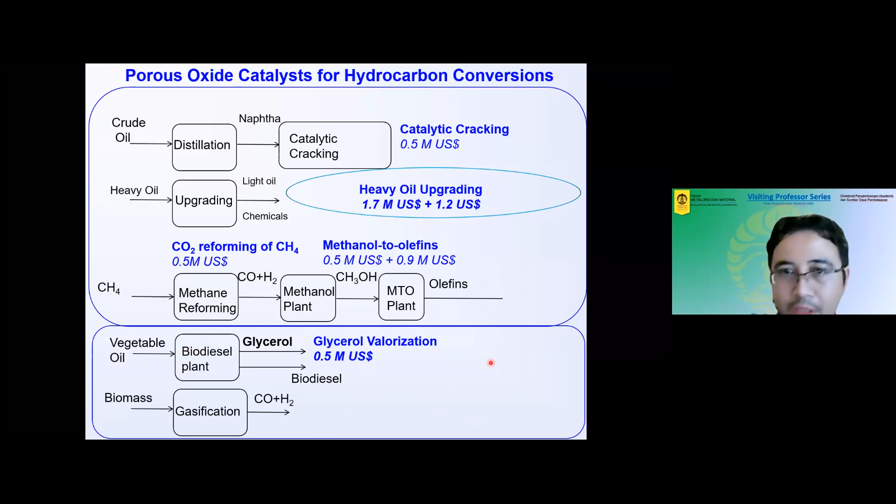As I'm also from Indonesia, I'm also interested in some developments in bioeconomy, how to monetize our natural oils, such as palm oil, etc. So if we see our country, we can see that we import many products. We produce mostly raw materials: oil, gas, coal, and crude palm oil, and then we import quite a number of products, including minerals and materials.

So basically, within this presentation, we would like to give our motivation for ourselves. How can we produce more materials and chemicals from local resources? And then also we would like to apply these materials mostly for energy fields, as a sorbent or as a catalyst.

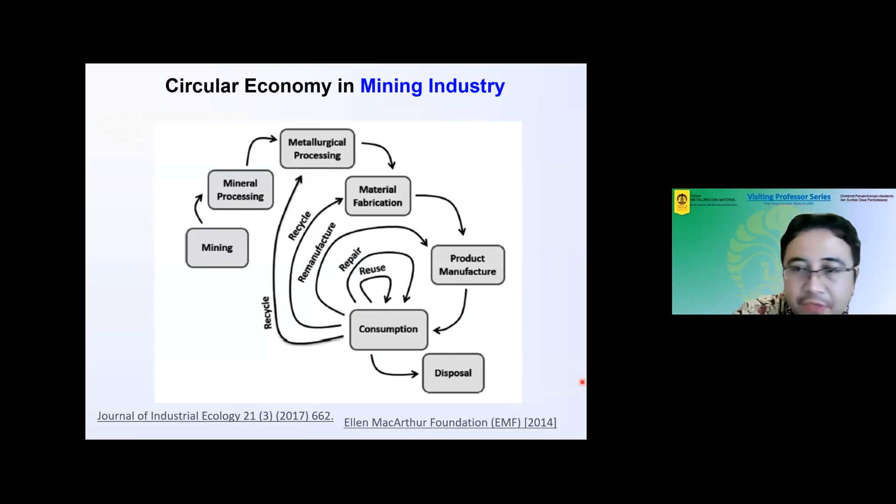Mining industry is one of the backbones of the Indonesian economy. As you can see here, we have the activity basically to get the metals from the mining industry through mineral processing, metallurgical processing, and then we have the fabrications. However, unfortunately, most of our activities are basically towards the beginning of this mining process. We do not have that much material fabrication and product manufacture.

With the needs that we have recently, the circular economy in every field, we need to think how we can have the complete picture by adding the circular economy concept into our mining industry. So in this case, we need to apply the concept of recycle, remanufacture, repair, and reuse.

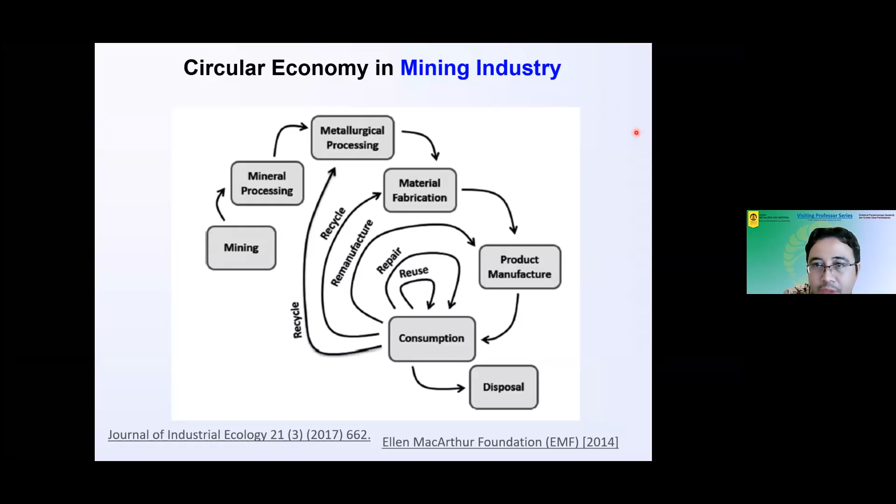And it's also important to relate the mining industry with other industries around us, because the mining industry also requires a lot of energy. So it's also strategic to think how we can have the circular economy not only for mining itself but also for mining and energy.

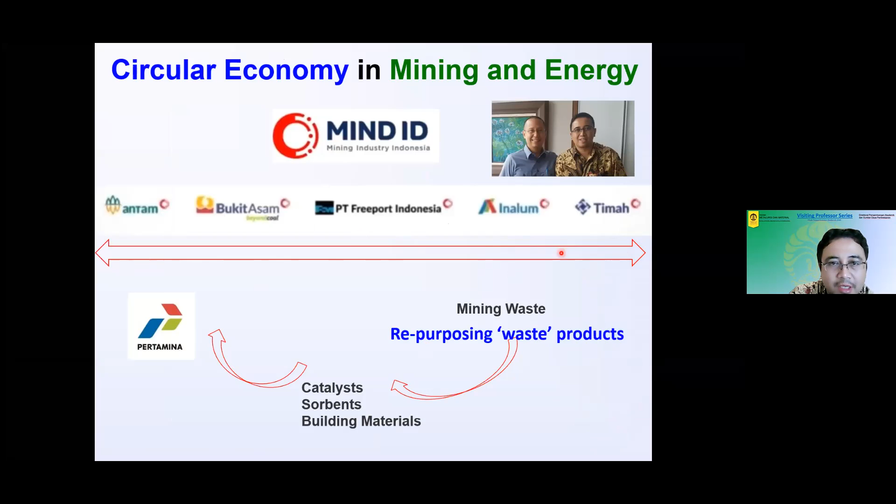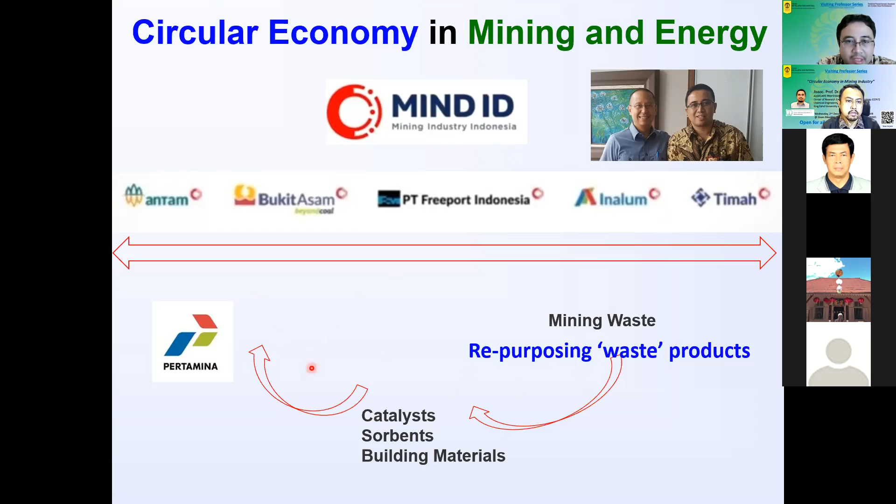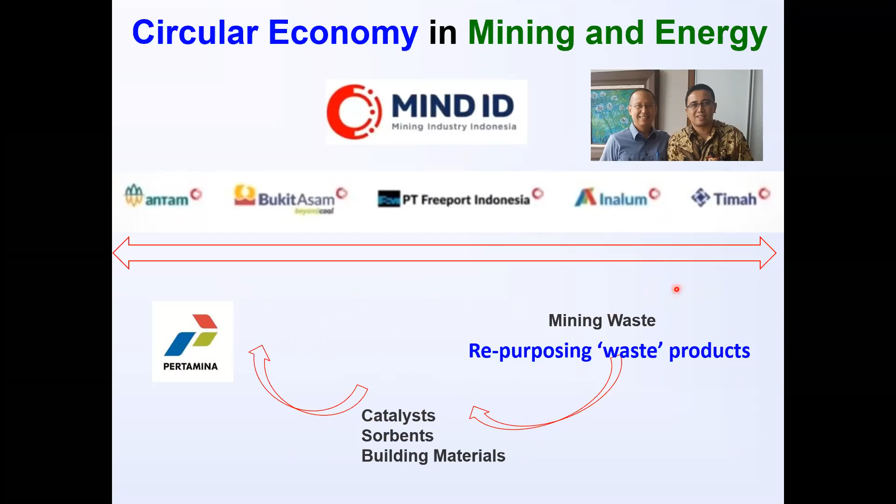So in Indonesia, for instance, we have a number of companies which are in the mining clusters, and it's strategic to think how we can utilize the waste, repurposing the waste products in such a way that they can be utilized, hopefully by the energy companies. We have a number of energy companies which need quite a number of materials, let's say oxide materials, which can be obtained from circular economy, from recycle, remanufacture, etc.

In Saudi Arabia, we have also a similar need. So we have been in touch mostly with the energy company, which is our neighbor. Actually, our university is an institution governed by the Ministry of Energy in Saudi Arabia. And at this moment, our president was the senior vice president of Saudi Aramco. So we have to think how we can utilize this concept in order to strengthen the energy and mining industry.

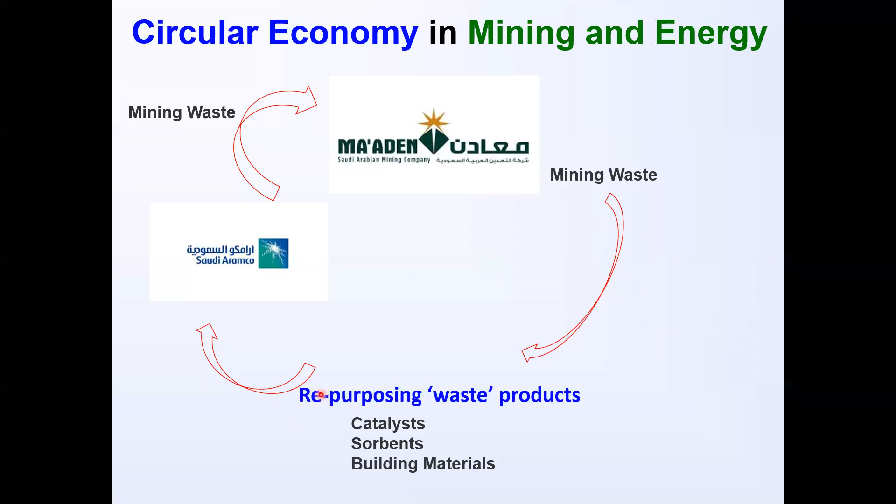So this is basically our project: how can we repurpose the waste from the mining industry, which is abundant and cheap, for energy companies. There are a lot of waste materials from the mining industry which can be utilized for energy business. So in this loop, you can see that mining companies are producing waste. From the waste, we can have a new business venture, and this new business venture will produce materials which can be used by energy companies.

So this is some of our work related to waste materials from mining, in which we classify the materials and then try to contribute to the development of technologies suitable to convert the waste materials into catalysts, sorbents, and in the future maybe enhanced oil recovery agents, etc.

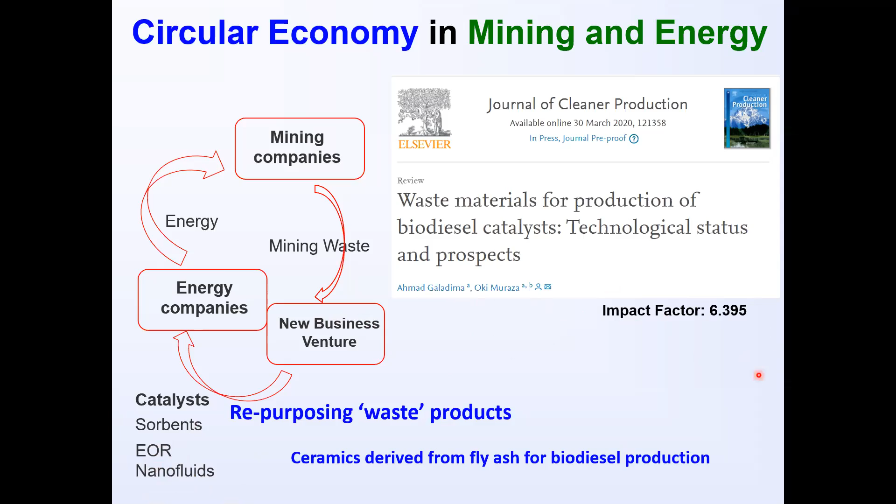We are going to see a number of wastes from our mining industry. Approximately 50 to 60% of Indonesian energy is coming from coal. And as you can see here, the coal is producing so-called fly ash. This fly ash is basically a strategic material which can be utilized for some classical purposes and also some new applications. It can be used in road construction, building materials, and some other materials, but it is also strategic for numerous applications, geopolymers, etc.

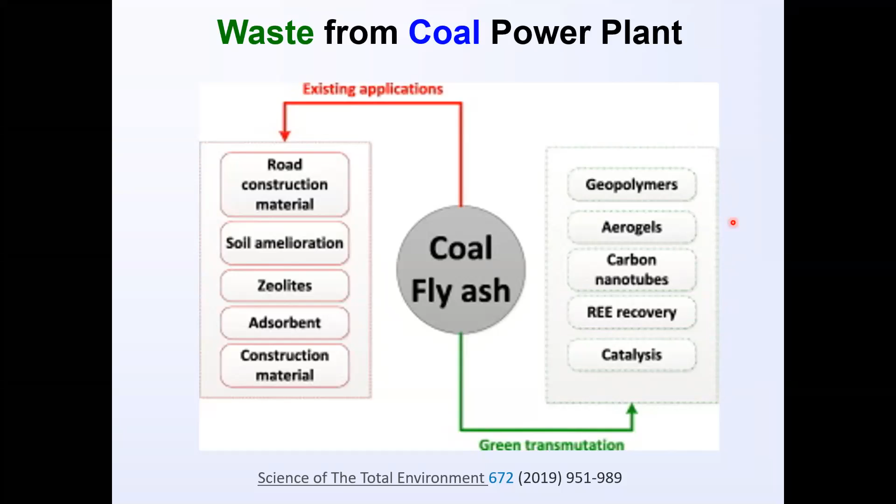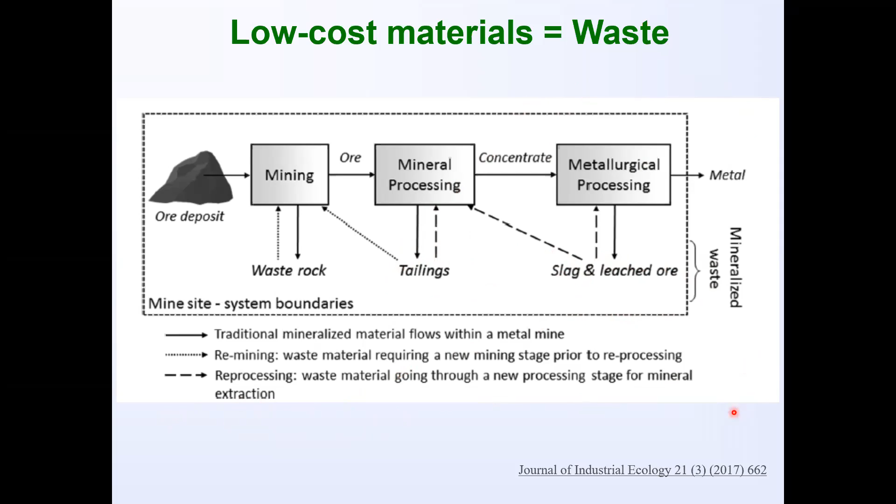And then we also see the waste as low-cost materials. I have visited quite a number of universities where most of the complaints are basically around materials for research. So in Indonesia, we are lucky that we have a number of mining companies producing waste, in the form of tailings or slags, etc. So these are basically cheap and abundant materials around us, as long as we have access to this waste. One of the classical utilizations of these waste materials is building materials.

Here we can see that the slag materials are applied for building materials. Of course, this is not a recent discovery. This has been done for a while. So one of the potential applications is in building and construction materials, as long as we have checked whether the material contains dangerous or poisonous materials, and then after that we can try to convert them to building materials.

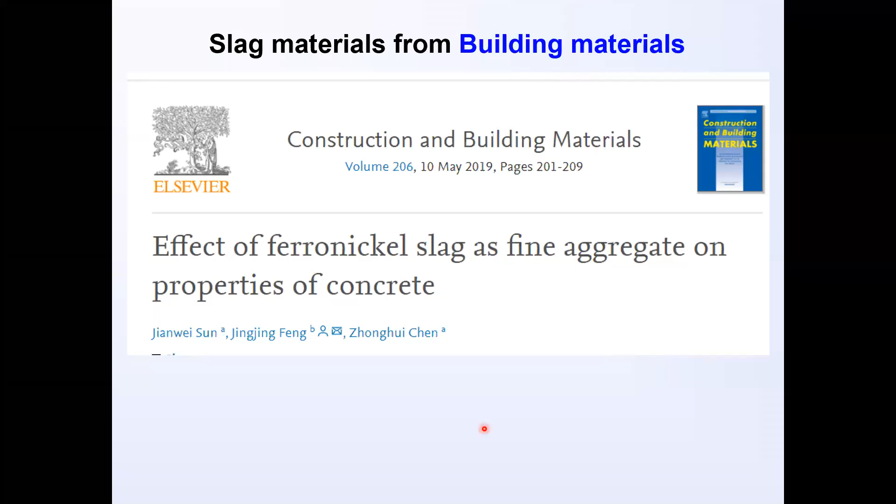The other application which is also quite famous is the utilization of the waste for the ceramic industry. So we can produce a number of materials, as you can see here, which can be obtained from the slag. We can develop slag with some other additives, and then we have refractory materials which can be applied in a number of applications.

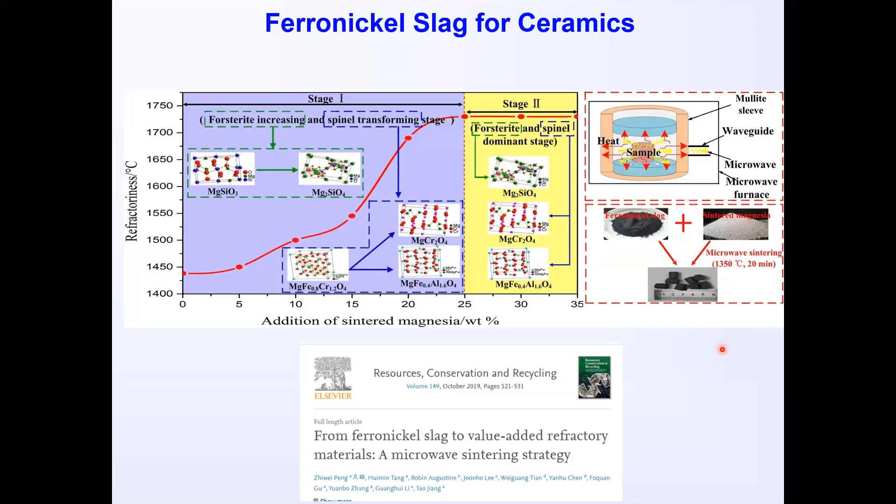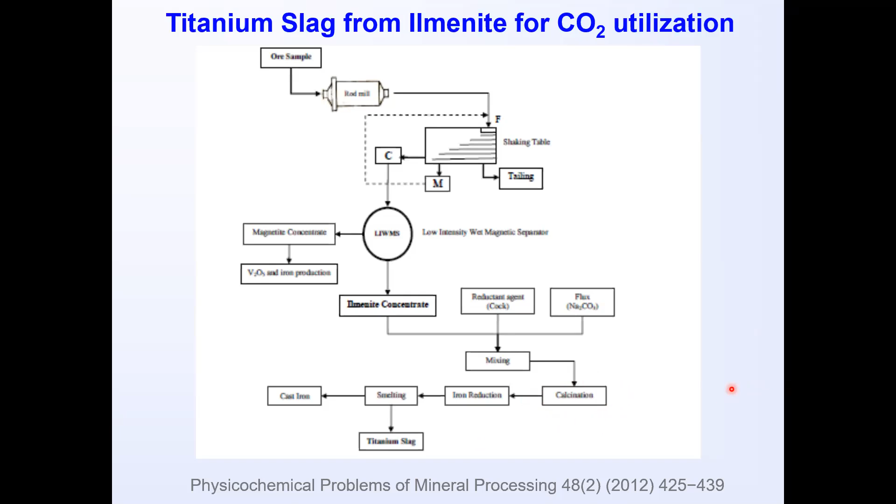Recently, we have hot topics around CO2 utilization. Here you can also see that the slag or the waste from titanium production was also treated, processed and modified in different ways, by pyrometallurgy, by hydrometallurgy, etc., in such a way that we can have materials which can be applied for CO2 utilization. I depicted some of the recent works.

For instance, here you can see the slag that we have, which has been treated and then further modified with nickel, and then the materials have unique properties which can be applied as a catalyst for this reaction. This is called dry reforming, or CO2 reforming of methane, in which we try to convert two greenhouse gases into something useful. This CO plus hydrogen, we call it synthesis gas. This is basically one of the feedstocks for the petrochemical industry.

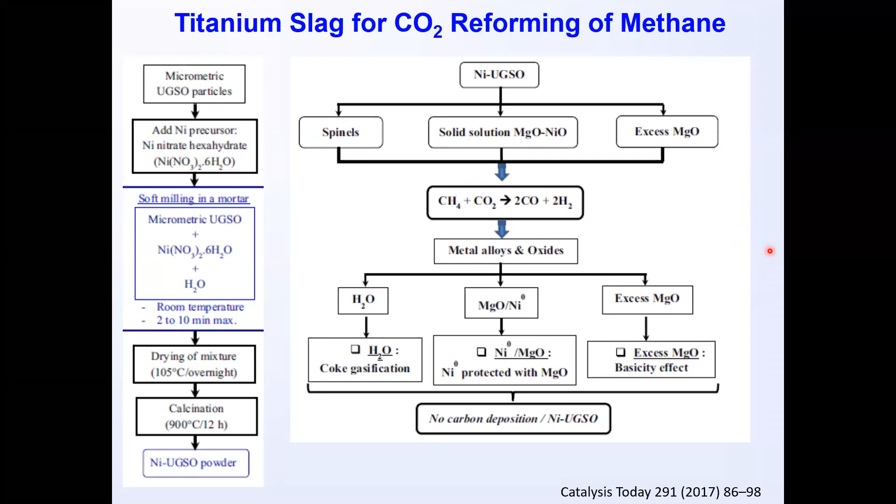So we start observing that some of these waste materials can be used for this purpose, for catalysis. So this also stimulates us in developing projects or activities with the mining company. One of the challenges that we have from the local company is the very large lake of red mud. Red mud is basically the waste or the byproduct of aluminum mining and alumina production.

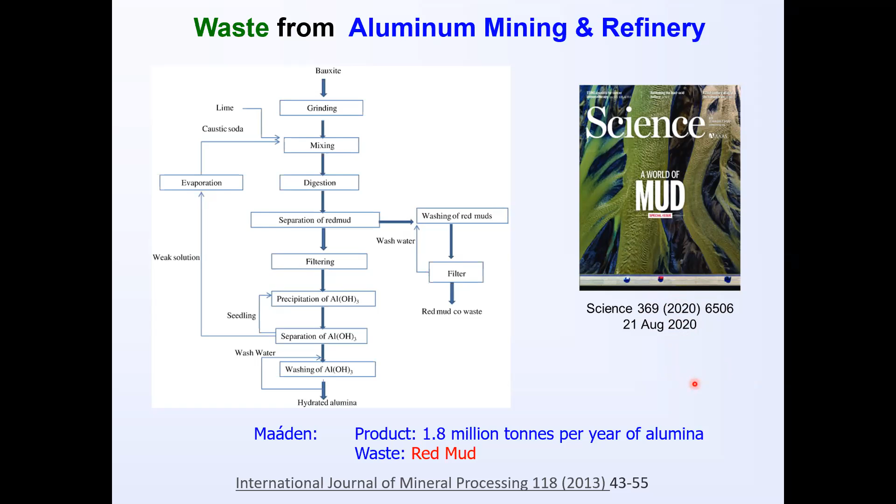Of course, there are a lot of efforts to recover something from red mud. We can see in the next few slides, there was an effort, for instance, to recover the iron by using magnetic separation. So this is basically to separate the iron elements from non-magnetic or less magnetic ones. In this way, we can produce additional income from the iron and also some other residue.

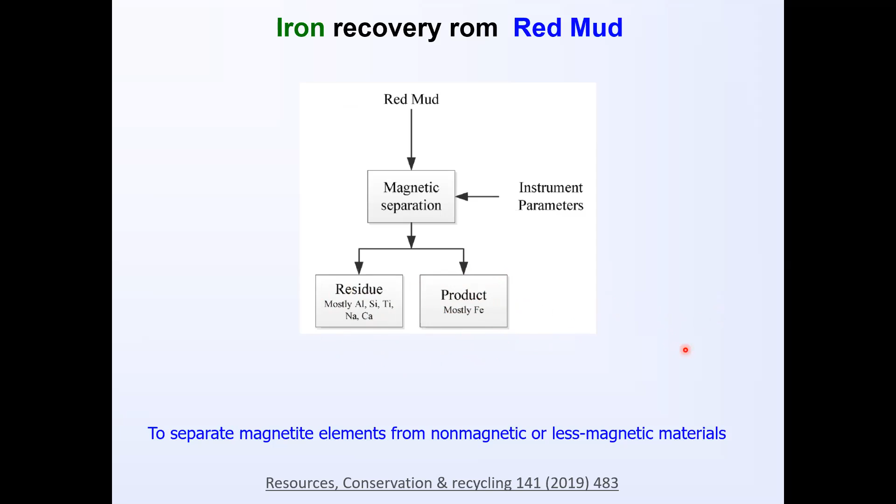And then with the major techniques that we have in extractive metallurgy, such as pyrometallurgy, there was also an effort where basically we can add a reductant. It can be coal, it can be biomass, in such a way that we can have reduction reactions for red mud. This is also another way to recover something from red mud. This is pyrometallurgy recovery, basically by applying heat, by applying thermal treatment. By this approach, we also produce something from red mud.

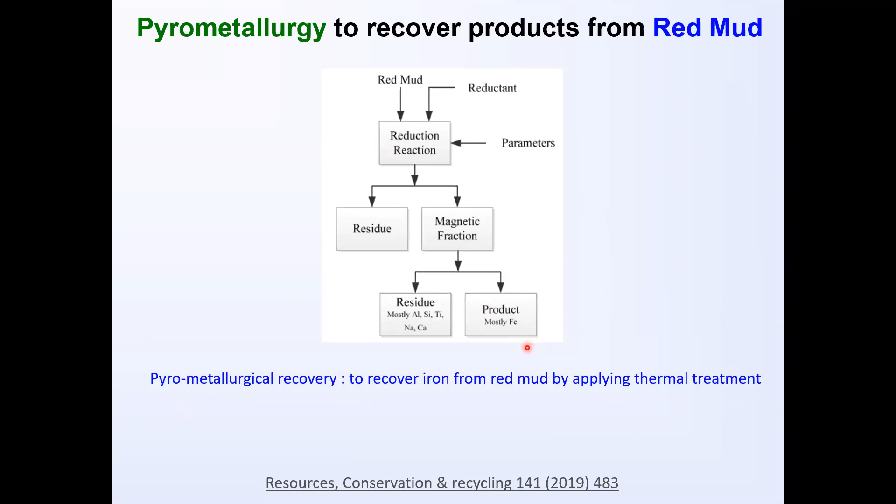And then there is also effort to apply hydrometallurgy. Basically, we try to utilize some knowledge on aqueous chemistry in such a way that we can leach or we can recover something from red mud. This is basically things that we have in our lab. Unfortunately, some of our manuscripts are still under review. So hopefully in the future, I will get the opportunity to share some of our activities to recover something from

red mud. We are interested in a number of components, because surprisingly, some of the red mud that I obtained from Indonesia also contains a lot of alumina. That's the first thing. And then some red mud materials that I received from the Middle East contain a good percentage of titanium, etc. So it seems that even though the process is a standard Bayer process, depending on the location, we may have differences. But mostly the main components of red mud are alumina, titanium, and also iron oxide.

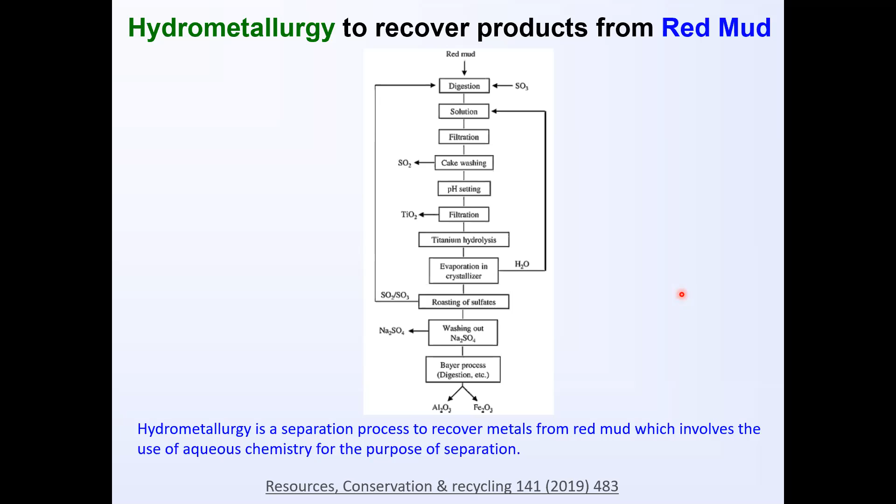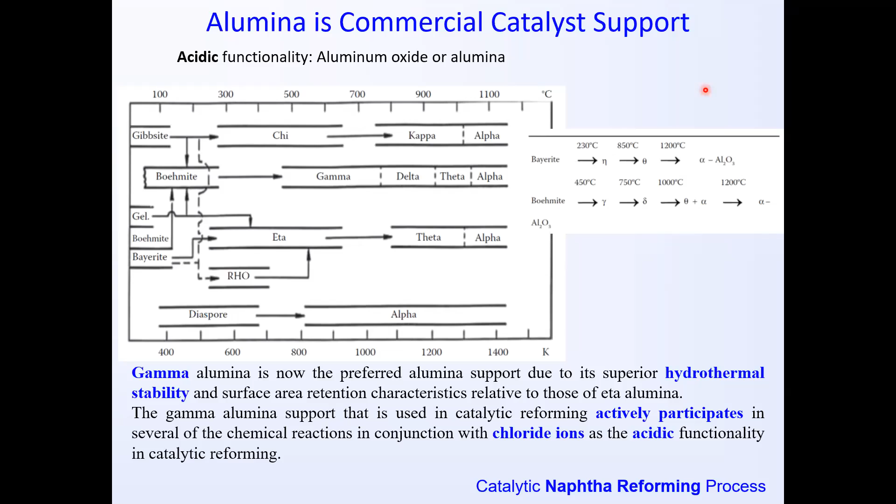And then alumina itself is a very established material. In refinery, we utilize this material a lot. This is one of the cheapest and most robust oxide materials for catalyst support. Here you can see different aluminas which can be obtained and applied as catalyst and catalyst support. Basically, these days, the industry prefers to use gamma alumina, because this material has better hydrothermal stability, and also the specific topological properties are better than the previous generation eta alumina.

So we have a lot of processes in refinery in which we utilize gamma alumina either as a main catalyst or as a catalyst support, mostly catalyst support. This is reforming, for instance. In reforming, we also utilize alumina as a catalyst. In our lab we also have some reactions in which we need alumina. When we received one batch of red mud from Indonesia which contained a lot of alumina, we needed to adapt and adjust the applications towards alumina. For some batches of red mud with low alumina content, we utilize them mostly for the silica and iron oxide contained in the red mud.

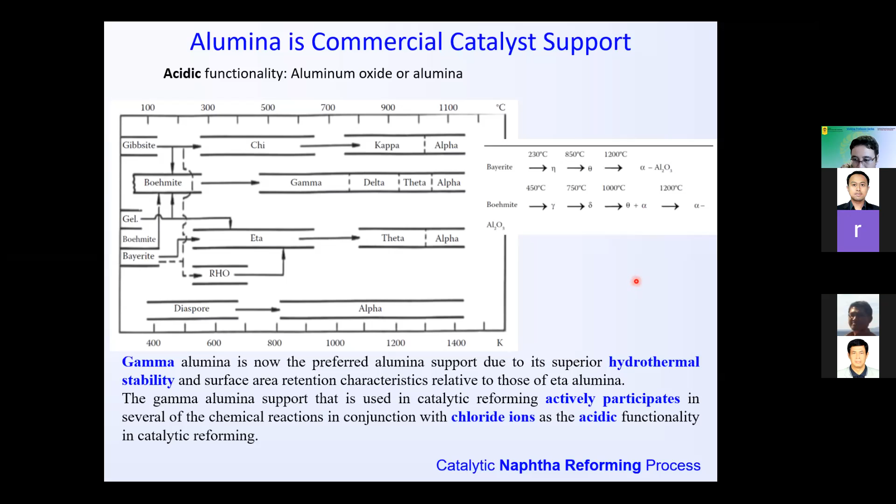And then we also have the concern of utilizing other types of waste that we have in Indonesia. Indonesia is one of the largest exporters of coal, and we use coal as one of the primary energy sources in Indonesia, and then we produce so-called fly ash. This is basically ash which can be utilized for numerous applications. Recently, we have also been in touch with a university which tries to utilize the fly ash from palm oil, normally from the boilers in pabrik kelapa sawit, or palm oil mills. So these are also ongoing activities.

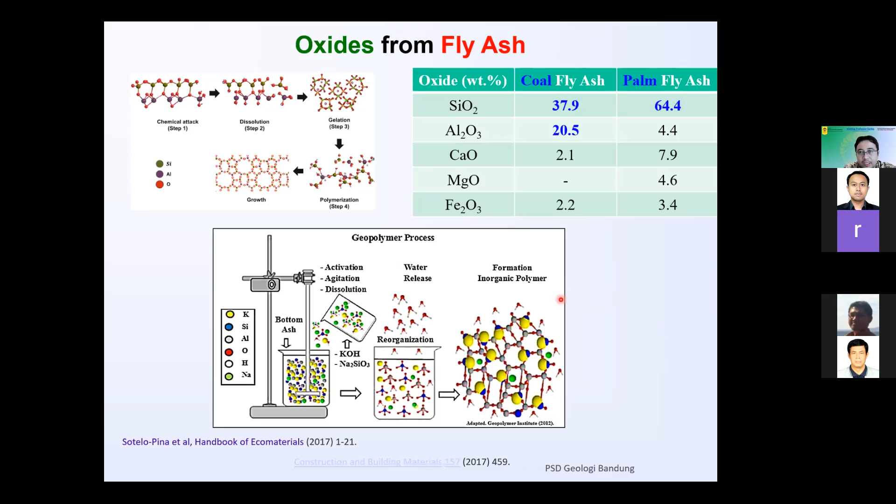We try to utilize the oxides from fly ash through chemistry in such a way that we get geopolymer. This is basically an inorganic polymer, which can be utilized as either catalyst or sorbent in the chemical industry. In Indonesia, it's also important to think about how we can have a loop between the circular economy in the mining industry and other fields. For instance, at this moment in Indonesia, we have a national program in bioenergy in which we try to optimize the energy coming from palm oil plantations.

Here you can see that we can utilize some of the oxide materials, either from mining or from palm oil. In this case, we utilize the silica and alumina, which can be utilized as catalyst and sorbent in one of these companies. This is something which can be pursued in the future because we have the mining industry in Indonesia, we also have the palm oil industry, and we need both energy and materials in Indonesia.

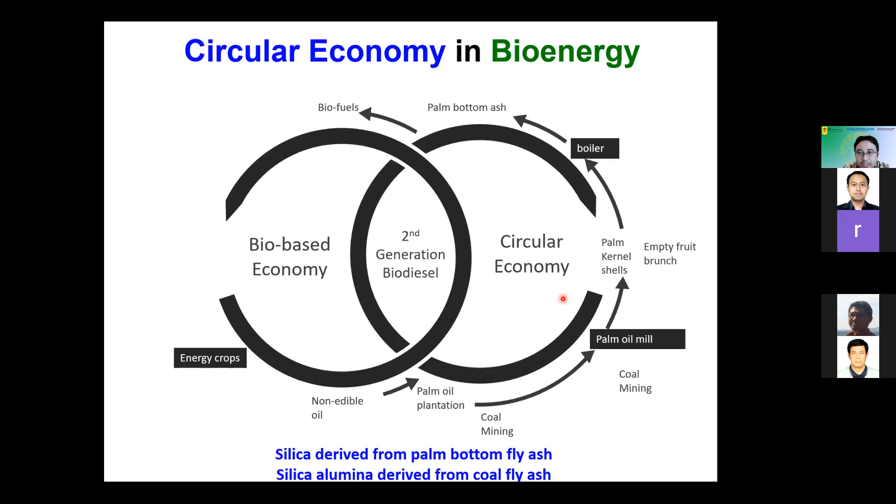The other strategic thing that we have in Indonesia is the national program for biodiesel. This is called B30 now: 30% of biodiesel mixed with conventional diesel from petroleum. And the government also set a target in 2022, we are going to have B40.

So it is also strategic to try to utilize some of these materials for these activities. So we can try to apply some of the oxides that we have from red mud, from fly ash, and from the other slags and tailings, which can be utilized as oxide materials for this program, biodiesel B30.

And after the pandemic, we learned that many jobs disappeared from society. In the US, they reported that 40 million people were losing jobs, and in India, more than 120 million. Indonesia, with a size quite similar to the US, with 270 million population, is also suffering. So we need to create jobs.

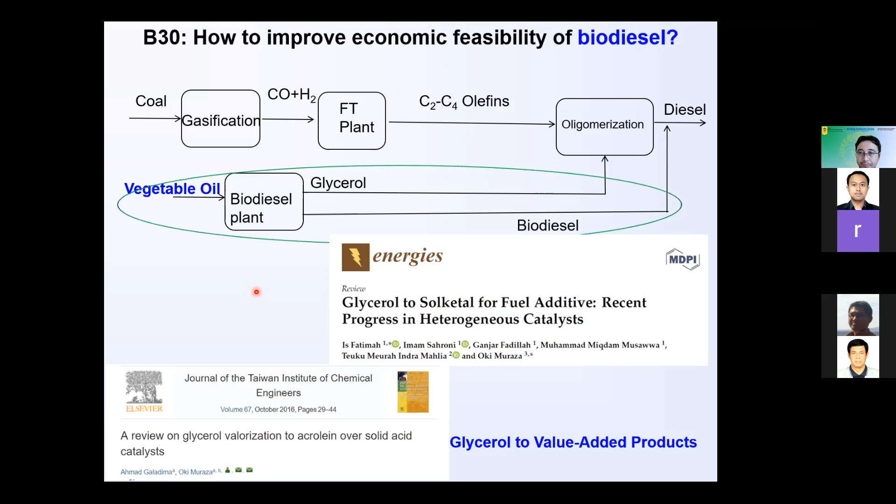One of the natural resources which can be tapped is mining and also natural gas. So these are some of our activities related to the development of new economic centers from natural gas. In East Natuna, we have a very large resource of natural gas, which contains a high content of CO2. CO2 can be 70%. But this is a very large resource which can create jobs in Indonesia in the near future.

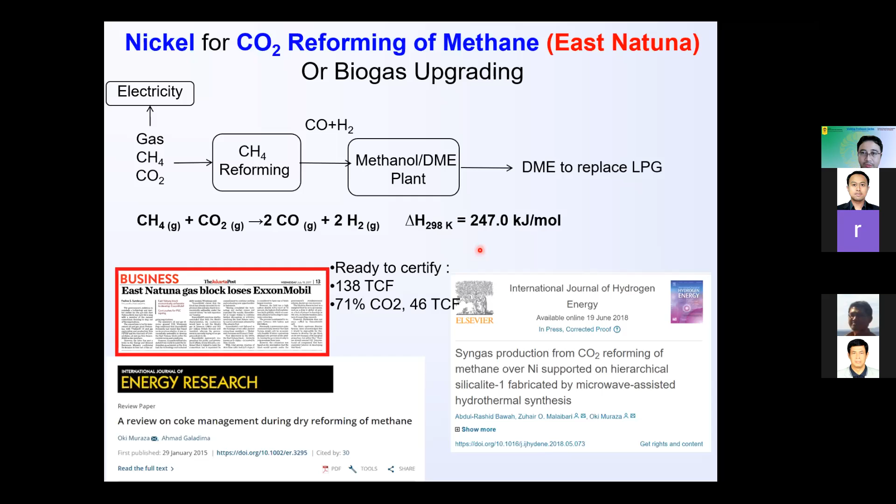So we also try to apply some of these materials from waste, from slags and from tailings, which can be utilized as a catalyst for these reactions. As you can see, this is the CH4, methane, and CO2 that we have from the gas well, which can be converted by utilizing these waste materials from mining to get CO and hydrogen. This CO and hydrogen can be utilized again to get products such as methanol, olefins, or aromatics that we can sell to society. So this is the CO2 reforming of methane.

Recently, there is also an initiative to produce DME, dimethyl ether. This is also a strategic fuel for Indonesia because at this moment Indonesia is importing LPG, very high import. Approximately 77% of the LPG that we use in Indonesia is imported from abroad. So we try to get DME, dimethyl ether, from natural gas by utilizing these oxide materials.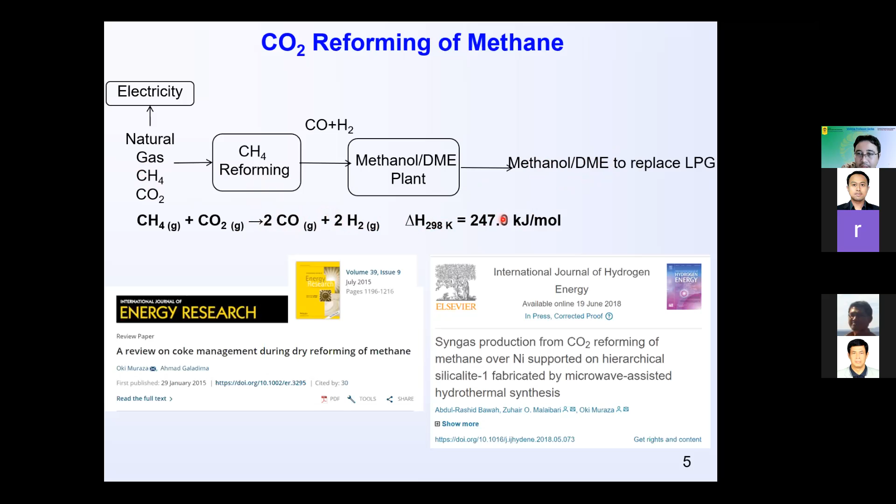And then the other resource that we have in Indonesia is waste. In addition to mining waste, we also have waste from agricultural fields. We have a lot of agricultural waste, which can be converted to energy by utilizing this mining waste. For instance, if we have iron oxide from the slag or from the tailings or anything from mining, it can be converted into a catalyst for waste to energy. This is basically biomass gasification.

In biomass gasification, we try to convert solid waste. It can be agricultural waste, or it can be MSW, municipal solid waste, to produce gas, CO and hydrogen. However, the problem is we always have tar. Tar is the unwanted byproduct, which can plug the systems, etc. So we can utilize our waste as a catalyst in order to have tar decomposition or tar cracking. This is also an ongoing activity that we have.

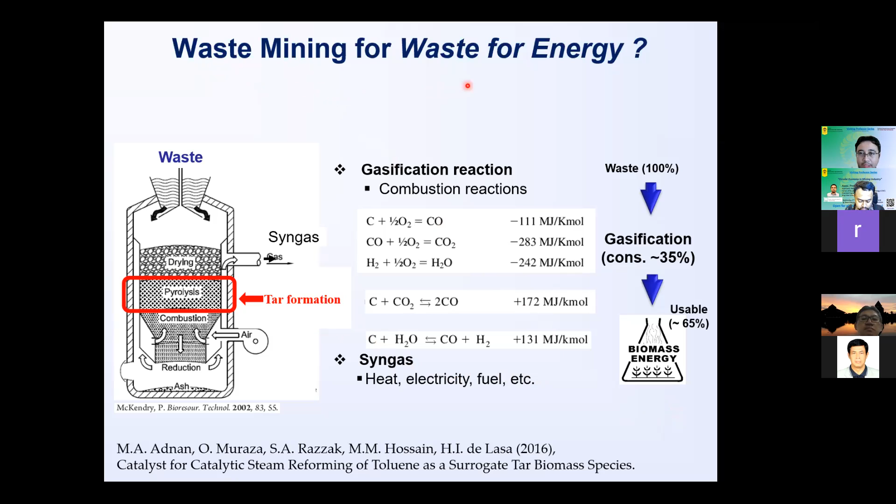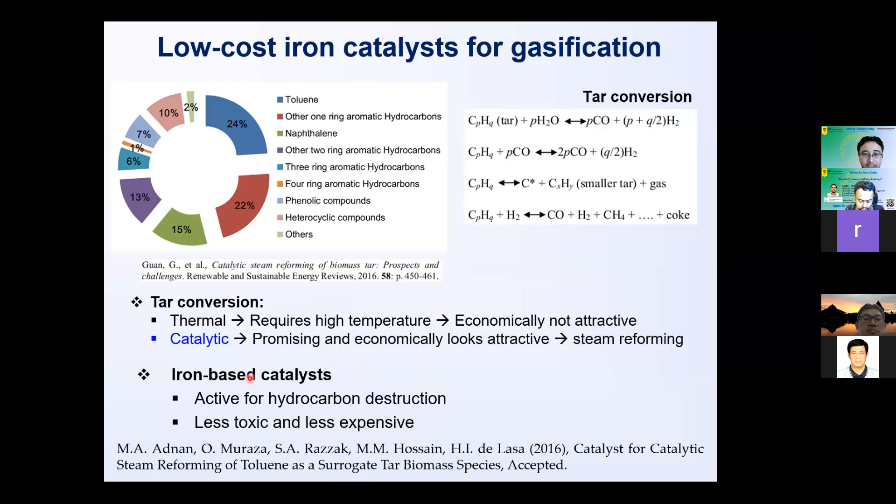We have nickel, and we have iron, and we are trying to employ the oxide from mining waste for gasification. These are some other details about the composition of tar, by using the iron or iron oxide that we have. Because this tar is creating problems, we need to develop a mild process which is a prospective process, so it will be attractive. Iron-based materials are cheap, and if we can get them from waste, it will be beneficial for us.

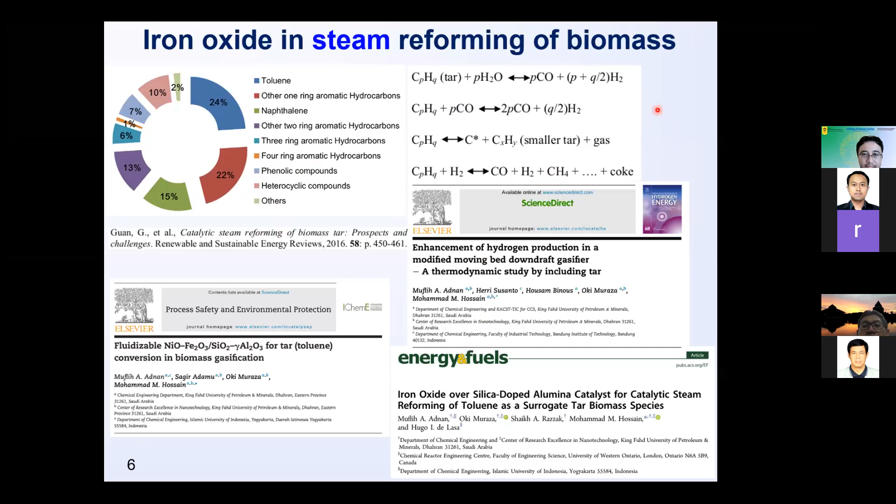So these are some of the iron oxides that have been applied for reforming of biomass. We try to get synthetic gas from biomass by utilizing oxide materials: iron oxide with silica, iron oxide with nickel oxide and silica, etc. These are materials which can be obtained easily from mining waste.

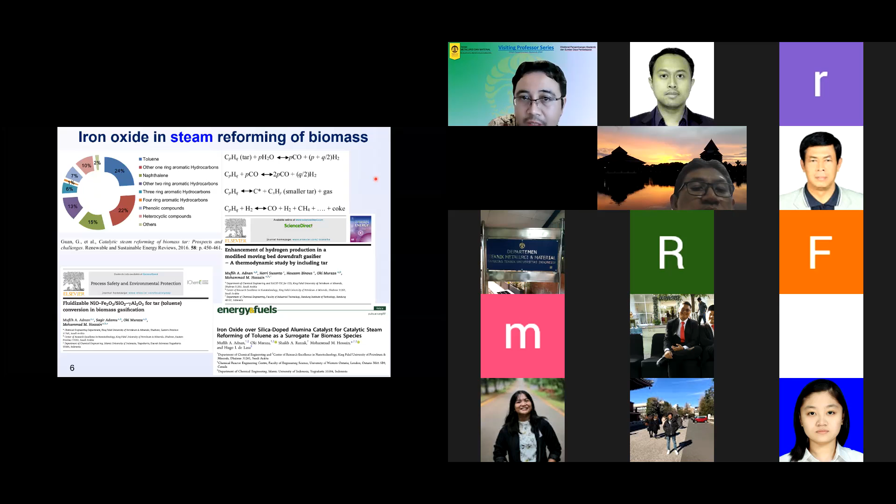And then we also have interest in robust oxides. Silica and alumina are very strategic for a mild process, but for an extreme process, for instance, a process with supercritical water, we need very robust oxides. So in this case, we are considering zirconia and iron oxide, etc. Basically, oxides which can stay in very harsh conditions, high pressure and high temperature.

For instance, this is in supercritical water. There are many works that can be done in supercritical water, such as the decomposition of plastic waste, the upgrade of heavy oil, etc. This is also something which can be pursued in the future by utilizing waste materials which may contain either zirconia or iron oxide, because they are robust and stable materials.

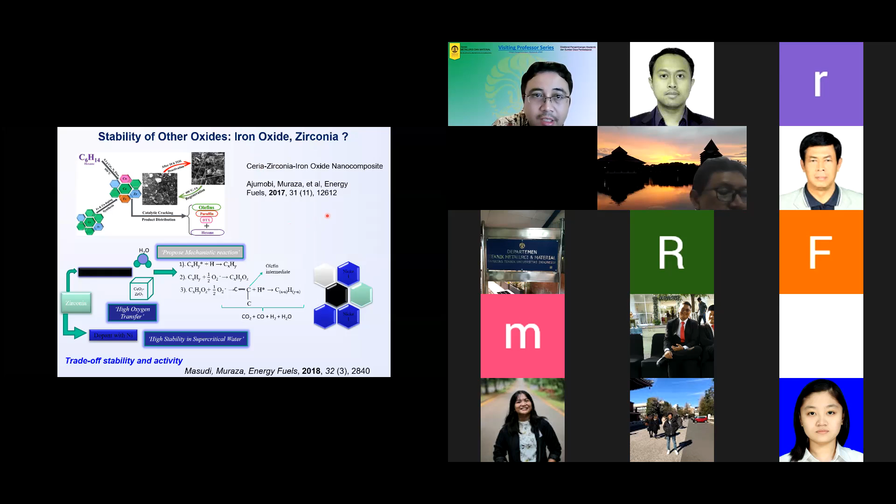So to summarize some of our perspective and activities, in Indonesia we have challenges in energy because we have a very big portion of energy from import. We need to have more energy being produced in Indonesia. And then at the same time, we have also environmental problems coming from different fields, including the mining industry.

So we can try to utilize or to modify some of the waste from mining industry, which can be applied in numerous fields. In my case, as we have facility mostly for catalytic reactions, such as catalytic cracking, and then we have also CO2 reforming of methane and other CO2 utilization, we try to use this mining waste basically as a catalyst and sorbent.

In the future, we expect that the energy and fuels can be produced over the mining waste and also agricultural waste. Both of them are abundant in Indonesia. So in the future also, we expect to have more collaborations to apply these low-cost materials for different activities, including the energy research. We can try to utilize the red mud, the materials that we are now collecting from different companies, and then some low-cost materials, iron sands. This iron sands we also have a lot in Indonesia. I receive iron sands from Aceh until Papua, and then also some other waste, also very strategic, fly ash, etc.